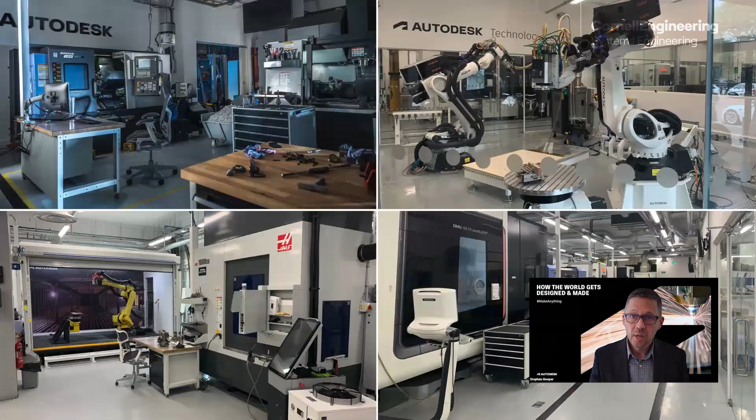So we've invested in our own manufacturing facilities. This is from our organization in Birmingham in the UK. If you're ever in the UK and want to take a tour of this facility, reach out to me and I can get that set up for you. We also have a facility like this in Boston as well, so if you're ever in one of those locations and want to take a look, let me know. Our belief is that by using the technologies and actually employing them, by doing work for our own customers, it helps us better understand how the technology works.

I think you'll also find in most curriculums now, there's a much heavier emphasis put on not just designing, but also seeing the project through to manufacture. And that's something that many professional organizations follow these days as well.

So strategy, why does it matter? Because whatever you do in the world of product design and manufacturing should be driven by what's going on in the market if you want to be successful. Our view is, and this is good news for you all, that in manufacturing there's a huge skill shortage coming. I'll talk a little bit more about why we think that and the implications in a moment.

We also think that there's a dramatic rise in cost. A lot of the global macroeconomic conditions that are being caused by some of the politics that are going on also have an impact on things like material and energy costs. And then the last one is supply chain disruptions. We can talk about those in a bit more detail, but what technologies do we think can solve those?

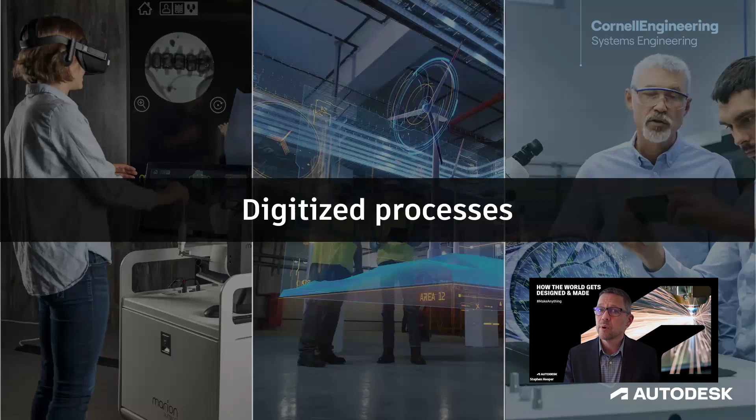Digitized processes: in manufacturing, the move towards digitizing processes has continued since the 1980s to the point now where just about every manufacturing process employs software. The problem is it employs lots of different software, so it makes it very difficult to connect the process. And of course, when you manufacture a product, you don't just use one manufacturing process, you use a whole range of them. So being able to model the system in that environment is also important.

Then the last one is flexible supply chains and logistics. From a logistical sense, that too is a system. So you have a system of suppliers that may be distributed geographically, and you need to be able to model the impact on those suppliers if you want to run a sustainable business. Because if you don't have a view of that system and the impact on your manufacturing process, you can quickly run out of inventory in the middle of a production run, which can be a big problem.

One of the drivers we see for this is that a lot of different technologies and software are used across the manufacturing process. So just in R&D, first article production and design, you could be looking at a range of tools like SolidWorks, Rhino for industrial design, KeyShot for visualization, SolidWorks for modeling, maybe Altium for electronics design. And then when you go into manufacturing, it gets even worse.

The problem is that each one of these tools stores information in a proprietary format that only relates to its individual discipline, which is task-based: 3D modeling, mechanical design, Altium for PCB electronics design. And so you're not able to get a reasonable view of the overall systems architecture, and that should include manufacturing too.

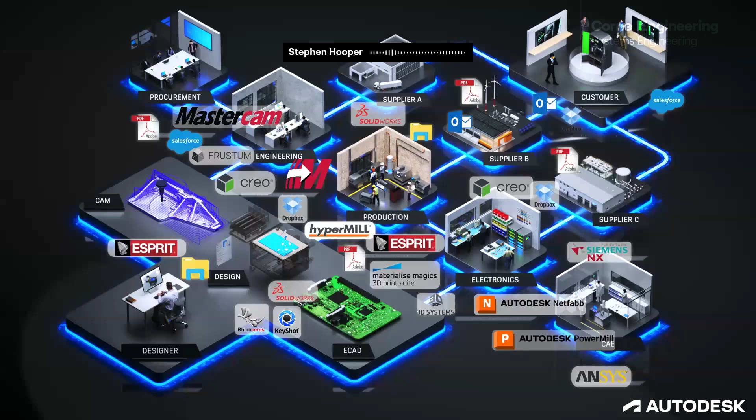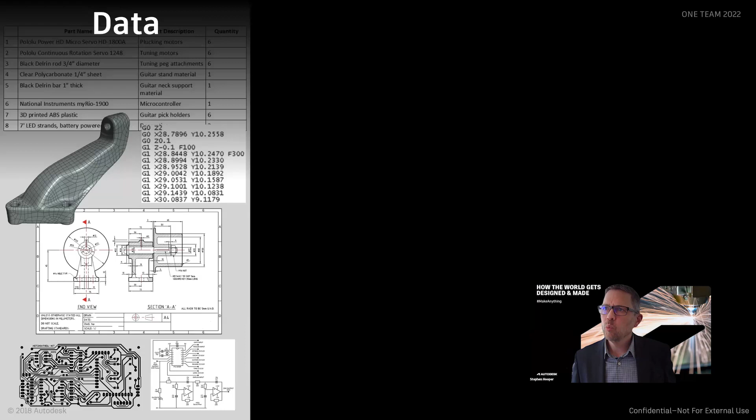We see three core barriers to this for customers. The first is that the data is abstracted and stored in proprietary formats, so boundary representations in models, which are stored in tools like SolidWorks in a parasolid body. You have 2D documentation, traces for electronics, schematics, bills of materials. None of this information is easily updatable. So if you make a change to the 3D model to propagate that change, you need to then go into the manufacturing system, open the proprietary file format, import it, update the manufacturing process, save it, move it on. It's a very waterfall process in an environment that really should be moving towards agile.

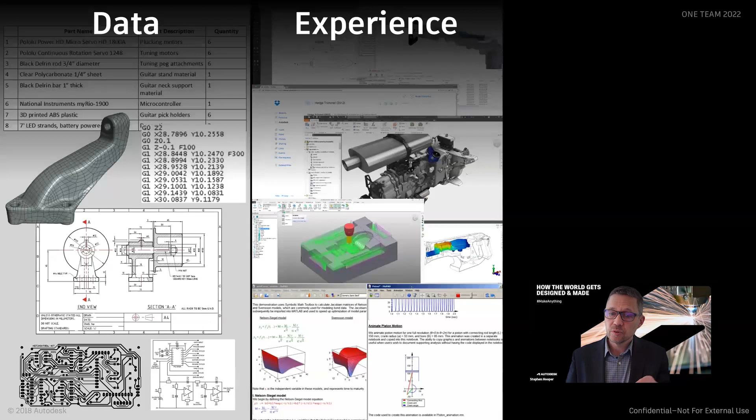The second barrier, and I'm sure you've all experienced this, is that when you use these different task-based solutions, they all have different user interfaces. So it makes it very difficult to learn how each one of these tools work and then how to pass information through them digitally. And then you need a PhD to really understand all of the different technologies in the market, how they relate to one another, and how you would build a single, consistent, cohesive digital thread through your organization.

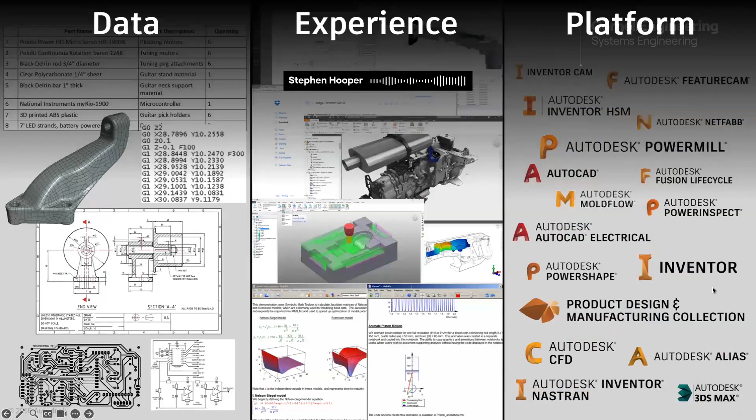And the same is true for Autodesk. We have a massive range of different products in our portfolio today. So our goal has been on converging all of our technologies into one single cloud platform that we call Fusion. The idea is that you build a single digital model that's open and extensible in a graph.

Now, a graph allows us to create a systems level representation, not just of the mechanical or electrical design, but its functional characteristics, as well as the manufacturing process used to produce it. That will ultimately enable us to better model and optimize those product designs and their manufacturing processes. I'll come back to that a bit later on.

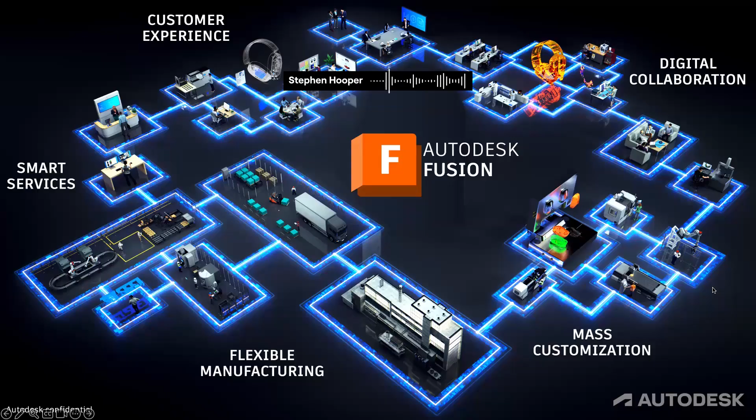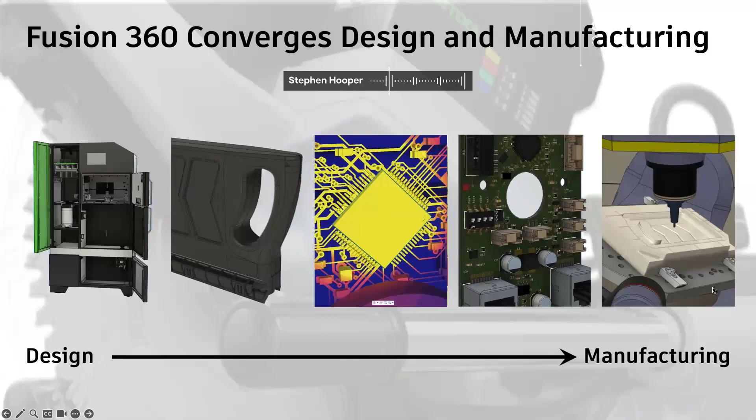Fusion today really focuses on the process of taking a mechanical design, industrial styling, electronics, simulation, and manufacturing. I wanted to give you a little flavor for this because it's foundational when you want to start thinking about systems architecture for a complex product. This particular example is from a company called One Click Metal, a startup making an additive metal 3D printer. So this is Fusion.

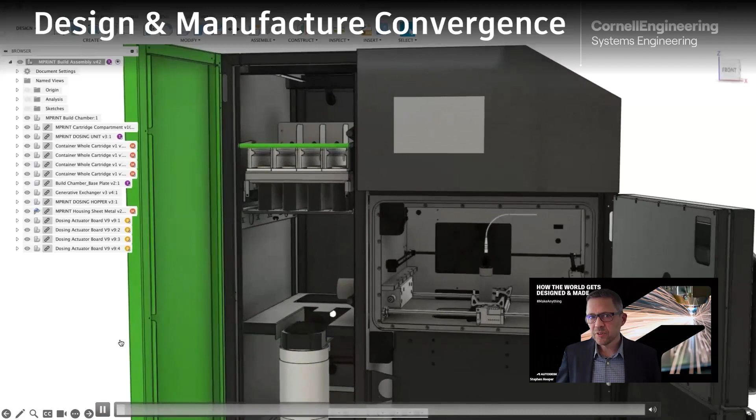The idea is that in Fusion, you can work with data from multiple sources. It can be SolidWorks information, or it can come from Inventor or ANSYS. You can aggregate that information as well as creating information here natively. If data in SolidWorks changes, it updates here.

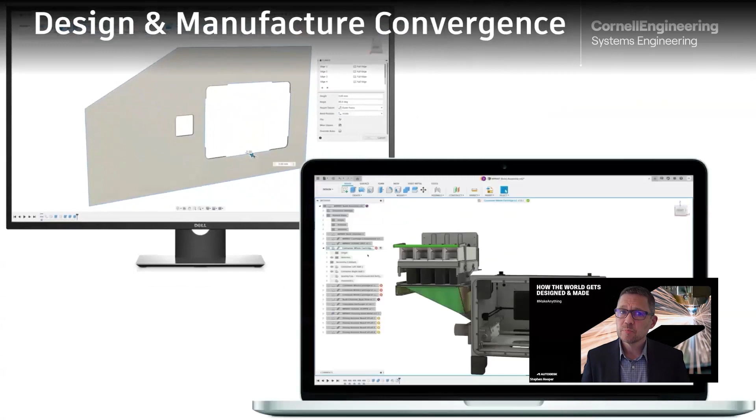The important bit is that it supports multiple personas. You could be a mechanical engineer doing sheet metal in the top left, or an industrial designer doing some styling for the cartridges that go into this system on the bottom right. In fact, you could be an electronics engineer as well, creating the schematics and control systems for the product.

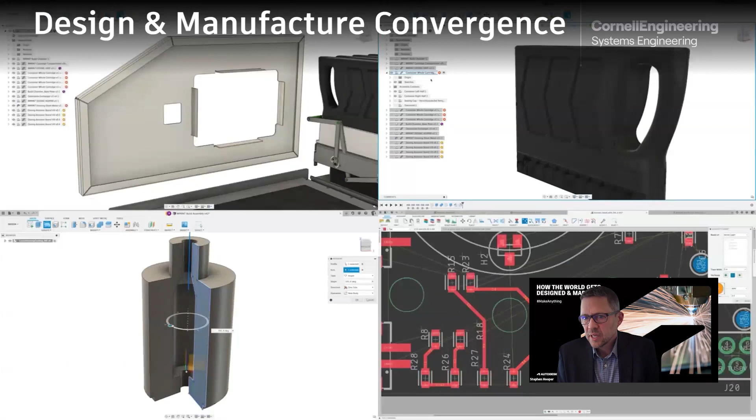The important point is that when teams work collaboratively together, they're accessing the same set of information, which represents the overall system, and they're able to collaborate in real time. A bit like Microsoft 365, you can see all the different users and the different product areas they're currently working in. The idea is that you can be concurrently engineering together as a team.

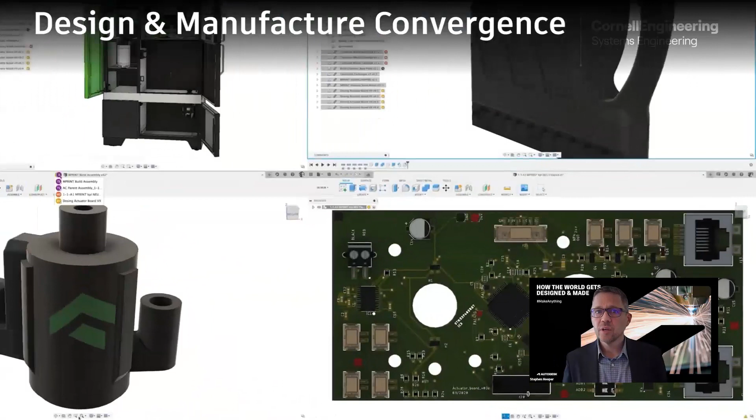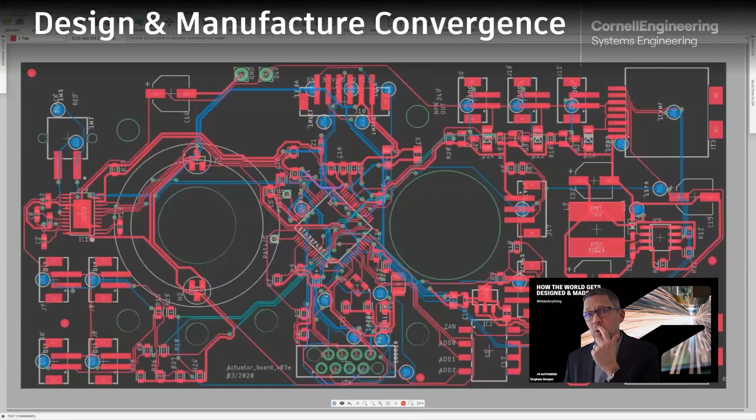So if you're in the electronics environment, you can start with a schematic. You can start to do some analysis of signal integrity across that schematic. You can lay the board out. You can calculate the traces. But because we have a single digital representation in the background, we can convert the 2D board layout and its traces to the 3D representation.

And that enables you to go through into a simulation environment so you can start to look at convection cooling across the surface of those boards to make sure the CPU doesn't overheat, for example.

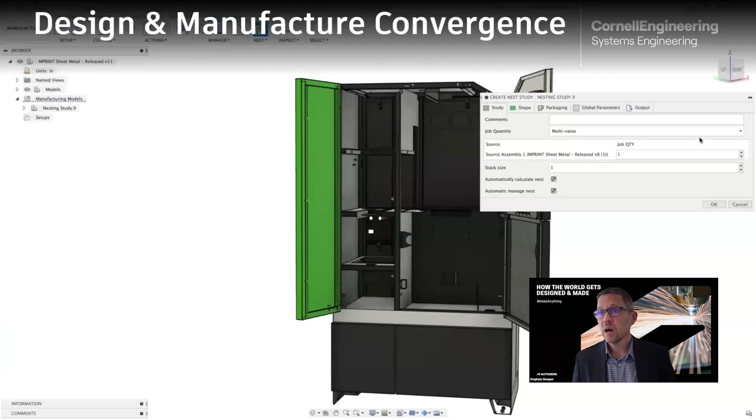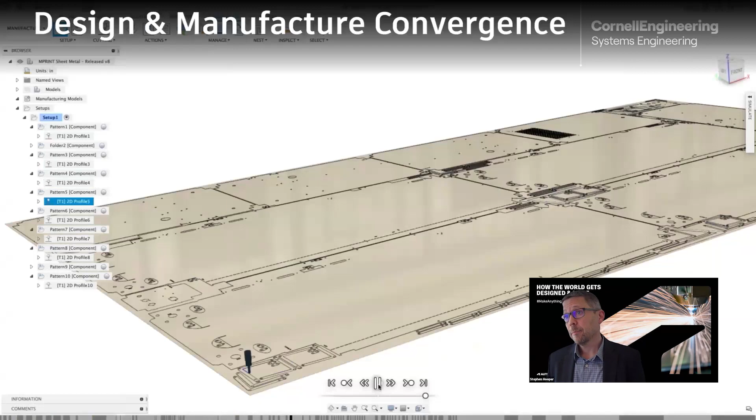The last phase is manufacturing, probably the most important. In this case, you can take the guarding and say, okay, extract all of the 14 gauge or 2 mm thick mild steel, schedule it for production, nest it, take it through to a manufacturing environment in the same platform, and then tool it. So you can choose, in this case, a plasma cutter, and it will calculate the tool paths for you, simulate that, and post-process the information so you can send it to the shop floor for manufacturing.

So that's the idea for Fusion. And as you can see, it's covering a lot of different disciplines. That creates a problem because as products get more and more complex, they involve more and more disciplines. Just in this simple example from a consumer product, there's electronics, mechanical design, styling, wiring, PCB, CPU, chip design. And of course, that gets very complex, and you can't get an idea of the overall product's functional performance characteristics by just 3D modeling it or by just looking at the schematics for electronics, for example.

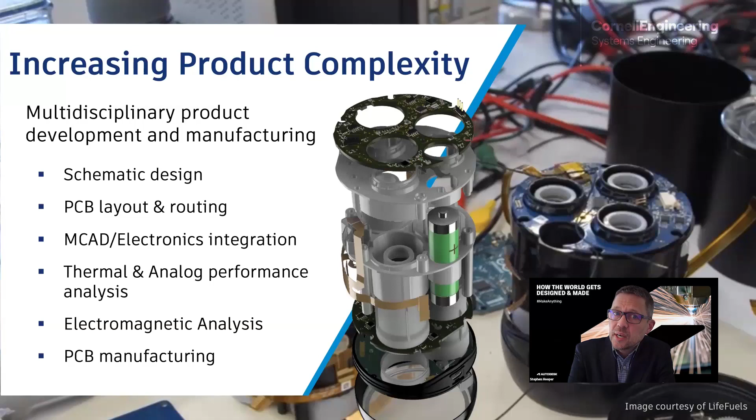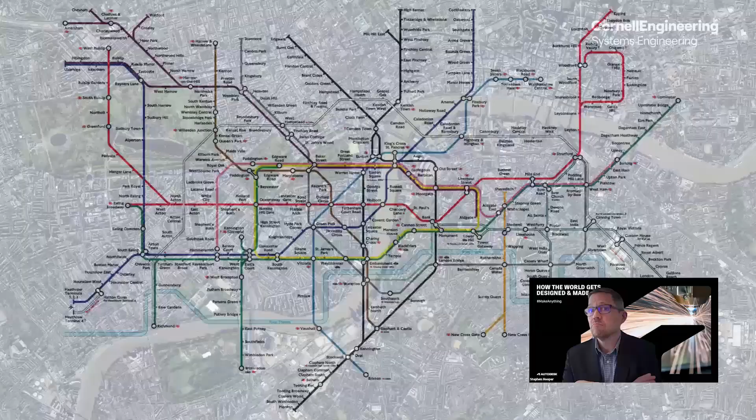So you go through a process of abstraction. One of the best examples of abstraction is the London Underground map. It's simple, it conveys only the information that's required, and it allows you to gain a much better understanding of one of the potential subsystems.

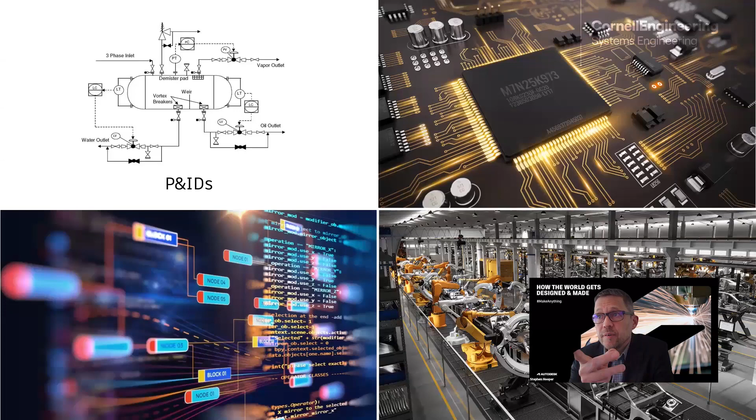That process of abstraction is something that's pretty common across all creative disciplines. For example, if you look at process plant, electronic, software engineering, or factory operations, every one of these industries employs a level of abstraction. If you think about process plants, they have what they call P&IDs, which is simply an abstraction of the higher order system for a petrochemical plant in this case. If you look at electronics, they have schematics, which is a higher order abstraction of the overall function for a circuit board in this case.

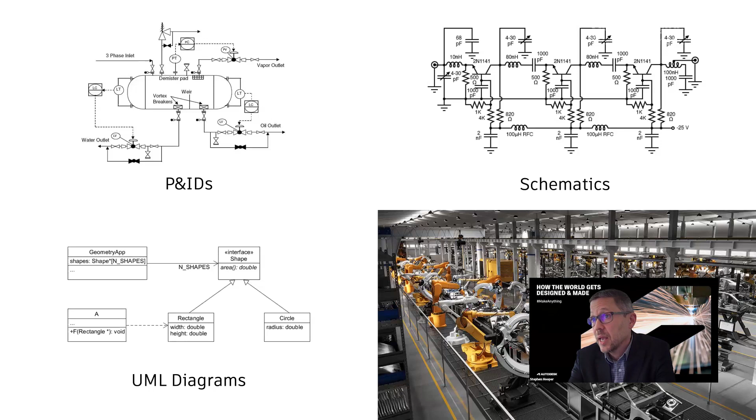In software, we use UML diagrams to create structural diagrams, class diagrams, or sequence diagrams that let us abstract the system and do black box optimization. And even in a factory, there are process models for production that allow us to do operation studies, making sure we're looking at a specific set of characteristics and optimizing them.

What I would say about MBSE is that it's pretty unique in that it starts to combine these higher order abstractions into a complete systems view. And the opportunity here is to extend that, so it's not just electromechanical, but also considers the manufacturing process itself. That's one of the areas we're focused on.

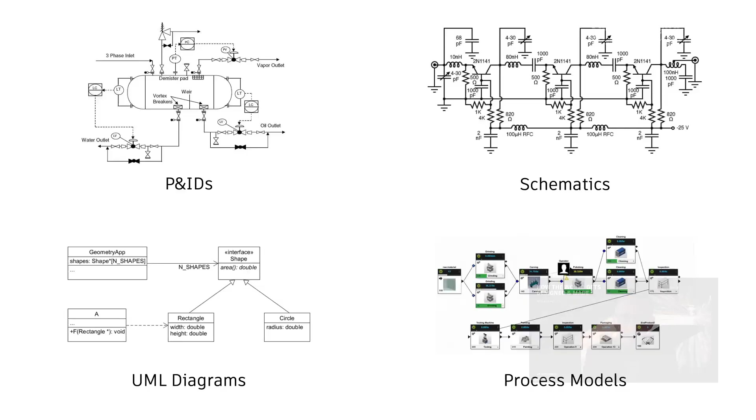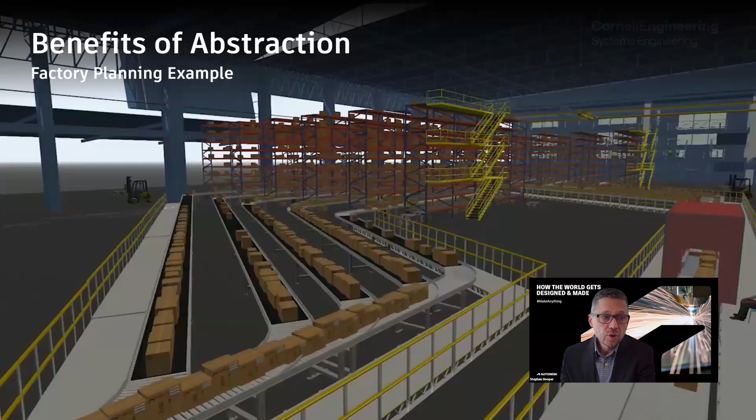I wanted to give you an example here. If you think about higher levels of abstraction, and I mentioned supply chains, Amazon's a great example. In this case, what we're looking at is an Amazon distribution logistics center. You can imagine in one of these centers, it's extremely complex to understand and model what's going on. You've got hundreds of thousands of products.

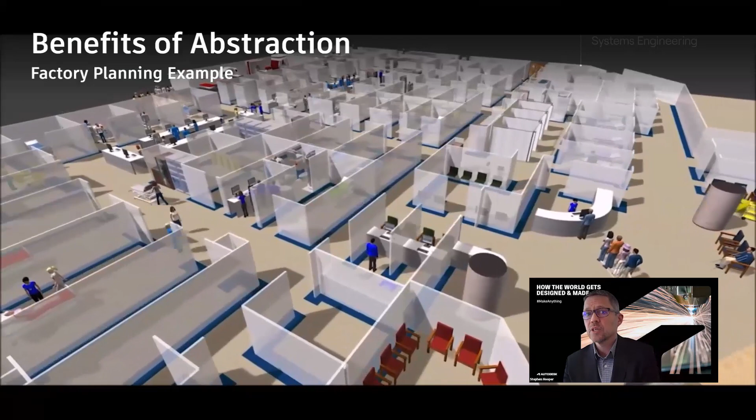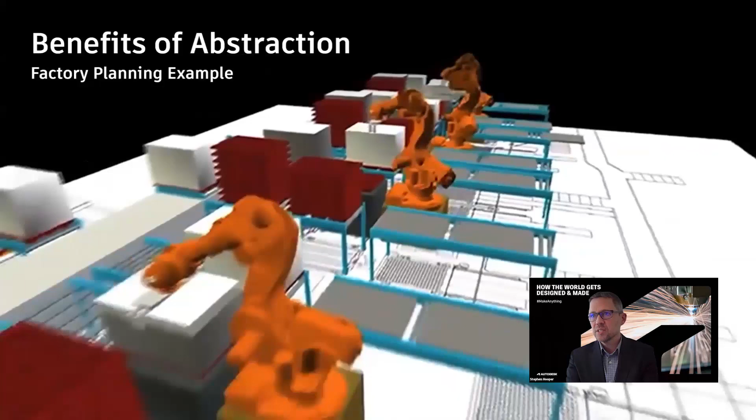The same is true in a hospital where you're processing patients. Logistics centers can be incredibly complex. Any shop floor operation where you're processing equipment and manufacturing products involves a whole array of different subsystems, including people and machines that are often unpredictable. So you can't deal with that level of complexity when you look at the entire system at once. You need to be able to abstract to a lower level of detail.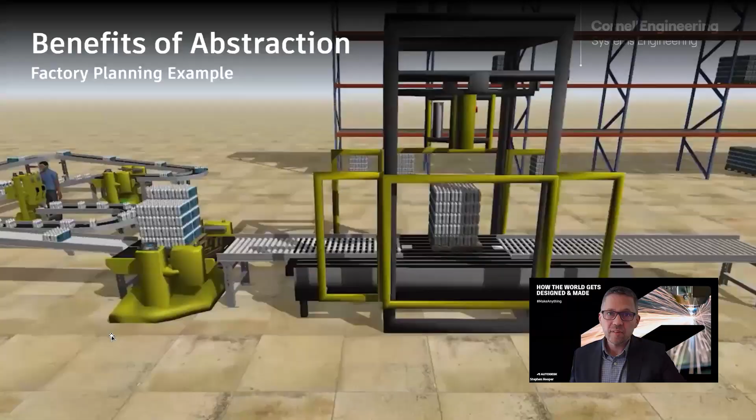So, in the case of operations management, is there anyone that studied operations in the room? Queuing theory, anything like that? No, okay, well this will be relevant, but maybe not so interesting.

When you look at how a factory operates, there are tools, mathematical formulas you can use to evaluate the flow of inventory. There's a thing called Little's Law, which looks at queue processing and queue management. There's a VUT equation, which helps you understand the impact of queuing, and if you pool multiple operators in a queue together, how you can increase the flow rate in a production process. The problem is this is also quite difficult, and you're looking at a particular slice in time. You're not able to evaluate the system with continuous flow across multiple lines and how they interact with one another. So that's an ideal opportunity for systems-based modeling.

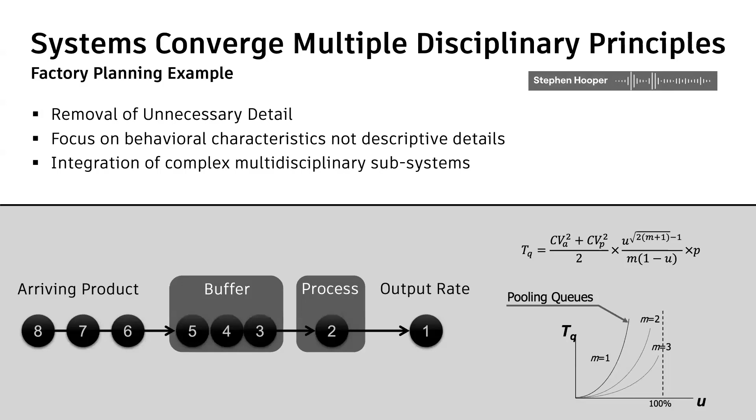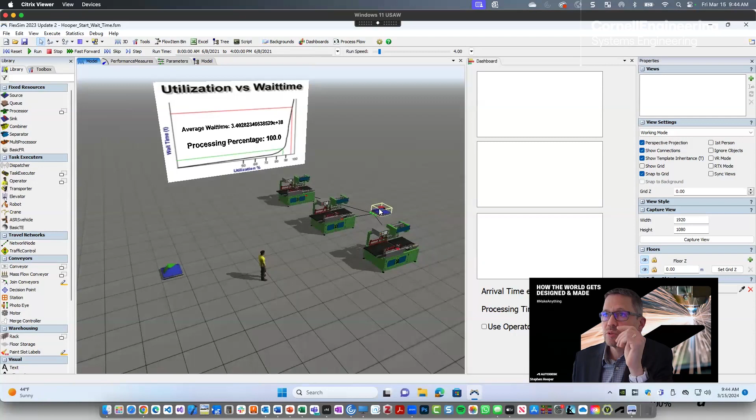Okay, so this is a good example of being able to abstract a system and model it. In this case, what we've got is a source and a sink. The source is where inventory is coming into the process. There's three machines that need to operate on that, and then there's a sink, which is the finished article going through the process.

In a layer of abstraction like this, what we're able to do is start to simulate behavioral characteristics. We can connect the source across to the machines. We can also tell the source that it has an operator, and for this source, we'd like this human being to carry the inventory for us. And so when we do this, we can actually run the analysis and start to get not just a singular slice in time.

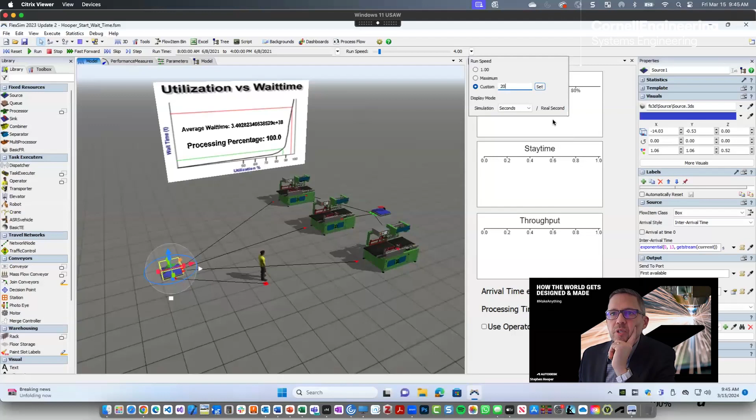Let's speed this up so we're not waiting too long. Rather than a single slice in time, what we're getting is a continuous evaluation for the whole process. You can start to see the operator processing products, and we can graph that data because it's an abstraction, which makes it easier for us to graph.

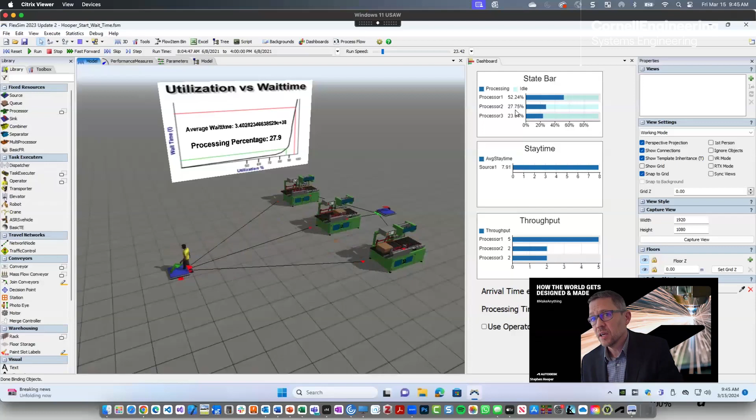You can see the operational utilization for each machine. In this case, we're reaching about 50% machine utilization, which isn't great, because if you've invested millions of dollars in your plant equipment, you want to make sure you're optimizing the machine for the best utilization so you have the highest flow rate and manufacturing process efficiency possible. So you can see here we're yielding about 16. If I run the simulation all the way through to its conclusion, we're probably processing somewhere in the order of 1,100 products in that time, with an average process efficiency or utilization rate of about 45 to 48%.

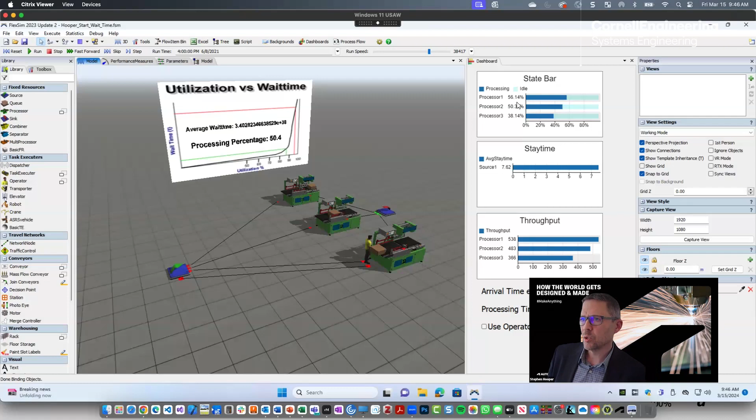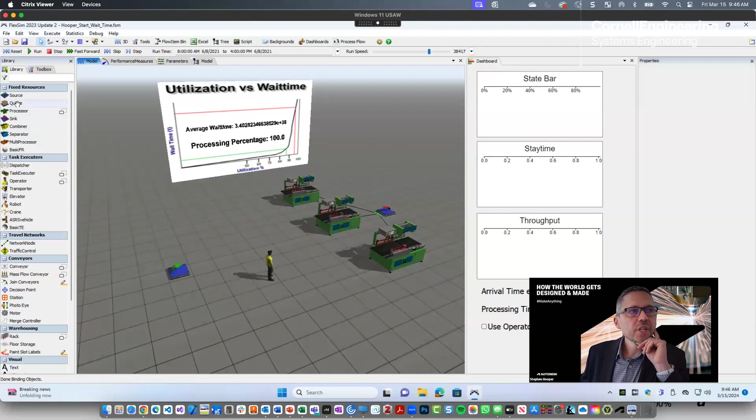So the thing about systems models is that they let you start to optimize what's going on in this model. If I come back, I'm going to break the links here, stop and reset the model. And what I'm going to do is introduce a queue, which is going to act as a buffer. So now I can connect the source to the queue, take the queue and connect that to the machines.

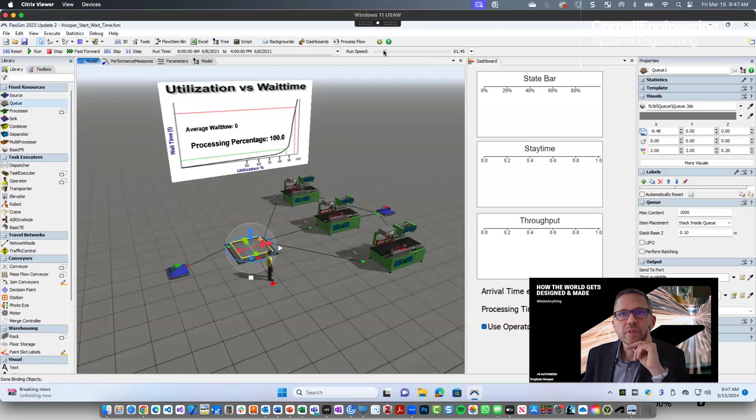And then I'll also connect the queue to the operator again and tell it to use that operator and stop and reset. Now I'll just change the timing so we can watch what happens a little easier, and then run this simulation.

What you'll see now is something slightly different. Because there's a buffer, we're allowing the inventory to stack up, and so there's still a single queue to the 3 machines, which is optimal. But now look at the utilization rates on each one of the machines — they're actually going up and up. Now we're up into the early 60s. I'll guess that when we run this through, we're going to end up with utilization rates in the mid 70s.

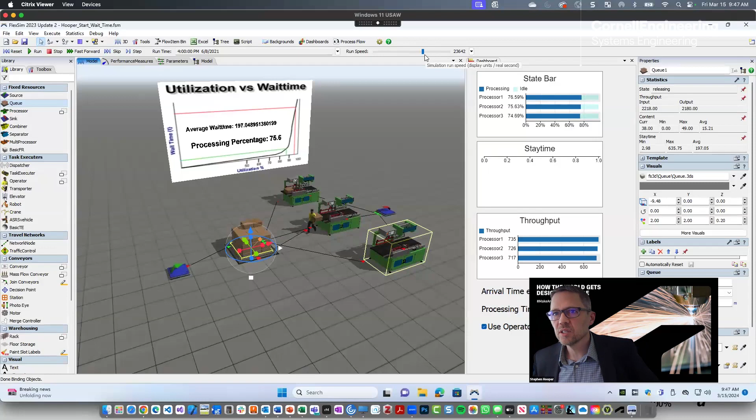So here we go. As it runs through, you can see we're up to 70%. And when we complete the simulation, we've got a mean processing time, or utilization rate, of about 75%. And the throughput now has gone from 1,100 products in the same space of time to 2,100 products.

So I realize not everyone in the room might be interested in operations management. Actually, you should be, because if you're going to go into manufacturing, the fastest way to fail is to design a beautiful product that can't be made cost effectively. So your job as a mechanical engineer, or an electrical engineer, is to create a product that solves a market problem — but above all, to make that product profitable. Your job is ensuring product profitability and accuracy, and these tools help you do that. The problem is they do it in isolation, so you're not getting a view of the entire system.

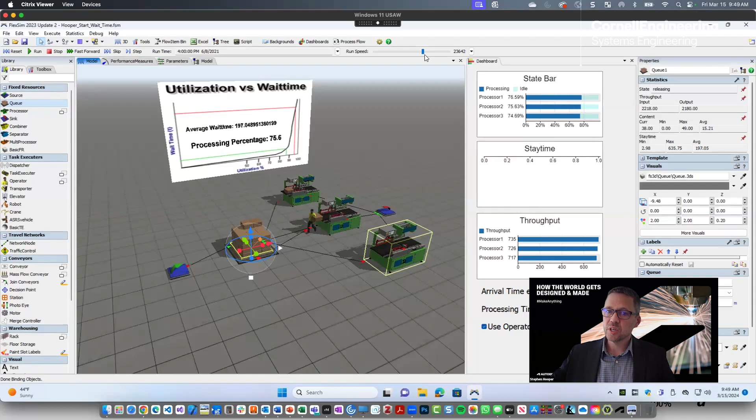In this model, for each machine we've calculated the mean time for processing, and we have statistical data — the standard deviation of arrival time and processing time. From that, we can model what we expect the factory flow to look like. But of course, there's a subsystem for the machine itself, and so you end up with this nested set of systems and subsystems, which is really the future of what you'll see in design and manufacturing.

Hopefully that helps you understand why abstraction of a complex system can help you model a particular characteristic in isolation, and that can let you optimize the process. Because really, MBSE is all about optimization of process. But that process is getting more and more complex, introducing more and more different processes or steps, and it shouldn't be completely isolated to just design disciplines.

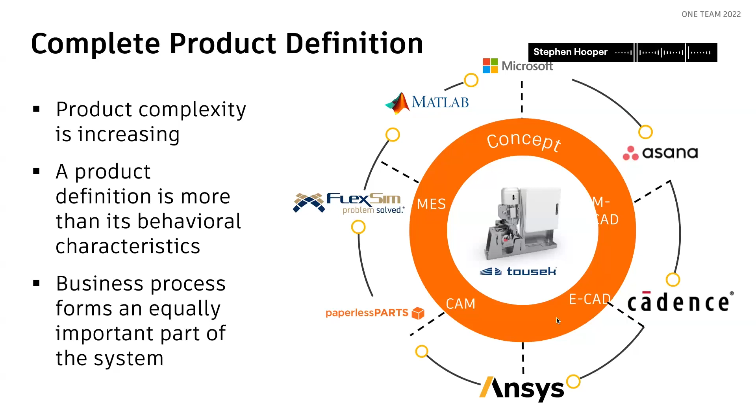So the product we just showed you for manufacturing execution analysis is a tool called FlexSim. But there are CAM tools — you need a CAM tool to model the process of machining or printing a part. There are electronics tools, simulation tools, but also business processes that sit around this. There are math modelers like MATLAB or Wolfram that help you look at the overall formulaic principles for a particular product. Those product behavioral characteristics are what you're seeking to model in a systems engineering environment, but the business process is just as important a part of that.

So you can see an expansion of these systems. You could take an average consumer product to market, and you'd need something like Cadence for electronics. You might use a requirements management system. You'll need a CRM system to sell it, like Salesforce. You'll be building software that needs to run on a platform like AWS. You'll need to model overall behavioral characteristics with something like Mechanica. You'll need to manage requirements, visualization, manufacturing, sourcing of materials, simulation, software elements like maybe some code in Python, and model the support process. Being able to model this complex environment is way too much information to process at any one particular level.

You also, as a mechanical engineer — not just a mechanical engineer, any form of engineer — need to watch out for one of the biggest issues: scope creep. Scope creep will happen as you take a particular set of market or customer requirements.

In software engineering, we talk about: did you build the software right? And did you build the right software? These are actually two different questions. Building the software right means making sure it's performant, it doesn't have bugs, and it does what you need it to do.

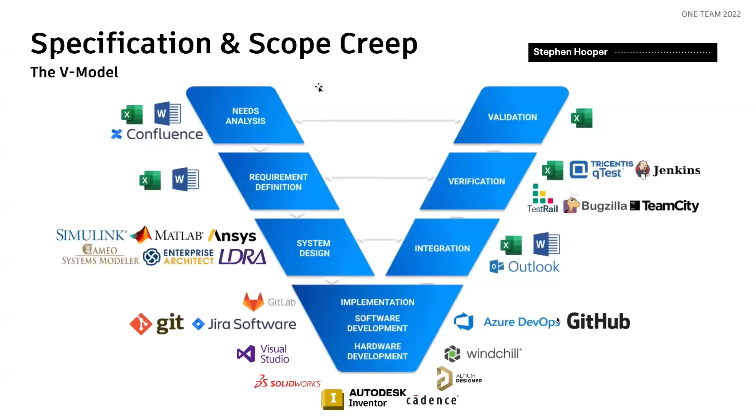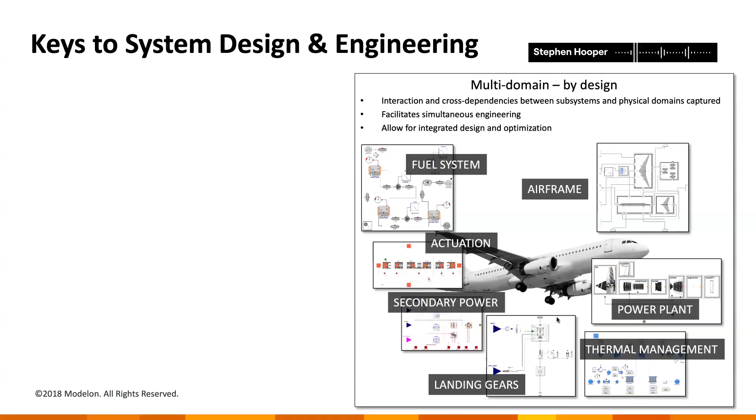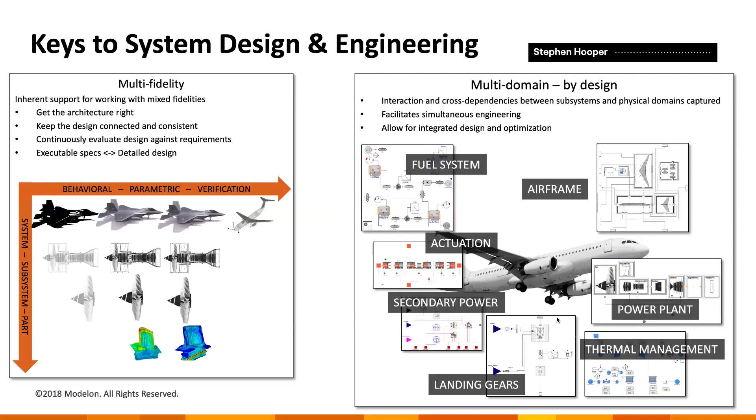That enables you to create multiple layers of abstraction as you move down from the overall architecture into the individual detailed disciplines. It enables you to go from the behavioral characteristics through a parametric definition into verification, while you go from system to subsystem to part level definition. That's kind of the key about what we're talking about here, being able to model that.

So at Autodesk, what we're trying to do is develop the foundational data structure to do this. We use a graph-based modeling system, and in a graph system we're able to store information in a database that's relational, and we can open up that graph to include all disciplines of the design.

So what I wanted to get into next is where this is going in the future, because I think this bit's really exciting. And this is the bit I want you to start focusing on, because I think it's going to be really important to your careers as you move forward.

So for the last 30 years, the software engineering tools used to describe products and manufacture them have been what I call task-based. We mentioned that at the beginning. There's a CAD tool, a CAM tool, a simulation tool, a data management tool. The information is all stored in a proprietary format.

We then talked about how these systems are converging so that we get one digital model representation of the product and its manufacturing process. Our view is that that's going to lead to disruption in the market in the form of what we call generative design, but intelligent automation.

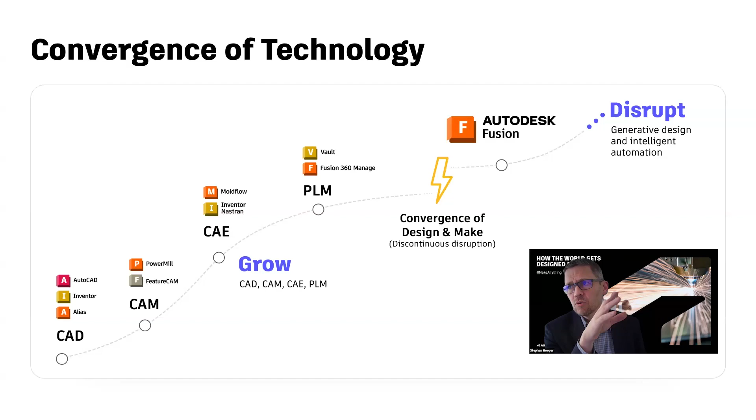Right now you're going to be hearing all sorts of stuff about generative AI. A lot of it's true, and it is going to be massively disruptive. It's in a bit of a hype cycle right now. Most of it is focused on text-based prompts, some of it in visualization. You're starting to see generative AI for video, for example. We think it's going to have a massive impact in design.

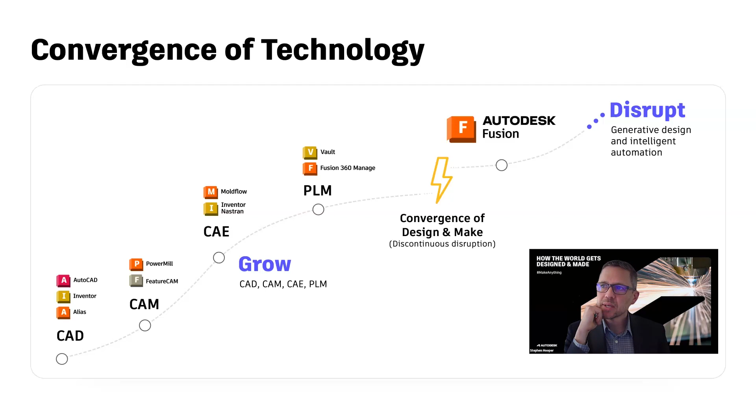We've been planning for this for a little while. First, we converged all of our technologies to create a single digital platform on which you can model 3D geometry, electronics, etc. Second, we built an open graph model for modeling a complete product. And now what we're starting to do is focus on automation.

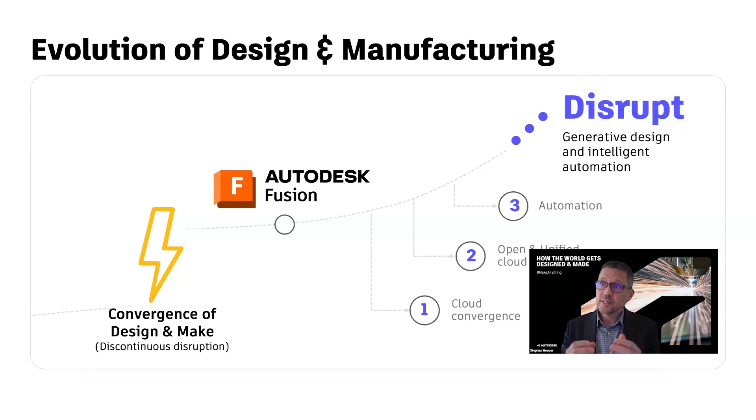This is why a systems level representation is going to be important. It means that if you understand the manufacturing process, you can start to automate the process of developing the design based on some functional characteristics.

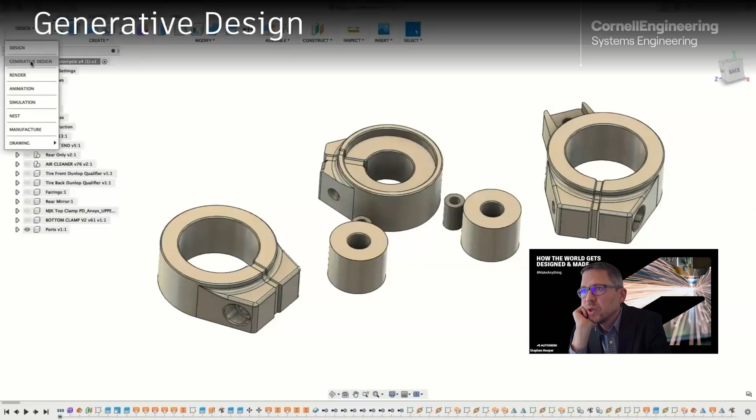So this is a quick example of generative design. In this case, what we're doing is specifying some elements of a design that we'd like to remain, the interface points. Then we can specify some design conditions: certain elements that need to remain fixed, some structural loading conditions, and areas of the design we'd like to avoid.

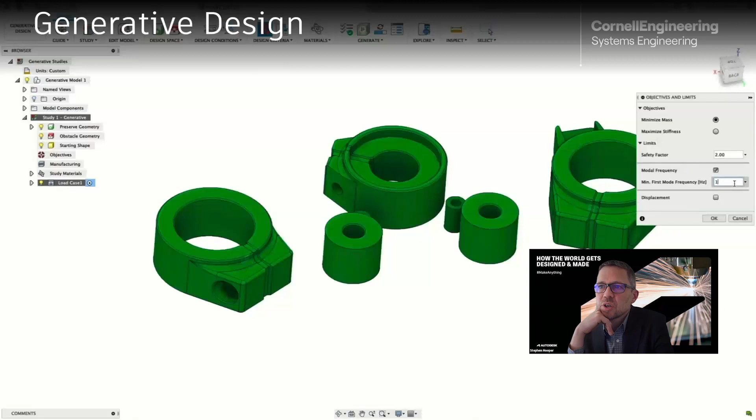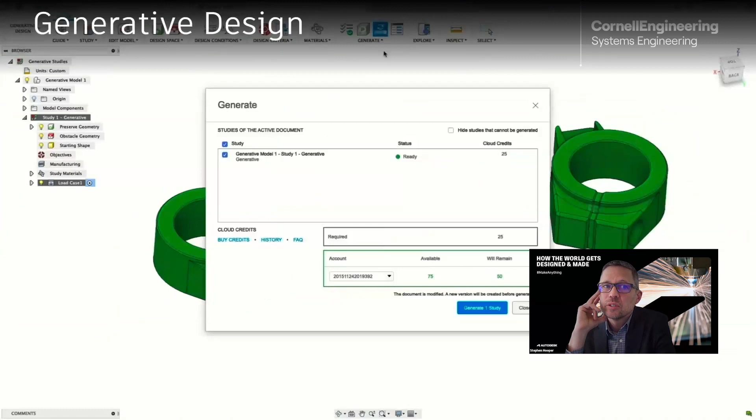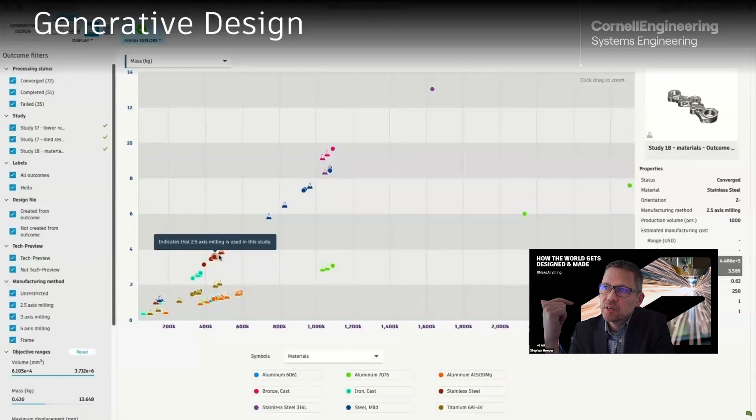We can also talk about what the optimization characteristics are. We want to optimize this potentially for a factor of safety of 2, say. We can also tell it the manufacturing process, because we understand the systems representation of how this product will be made. With that information, we can generatively define a range of different options for the actual mechanical design. As an engineer, your job is really just to make the right trade-off decisions to get the optimal part — maybe weight versus factor of safety, factor of safety versus cost, or cost versus weight.

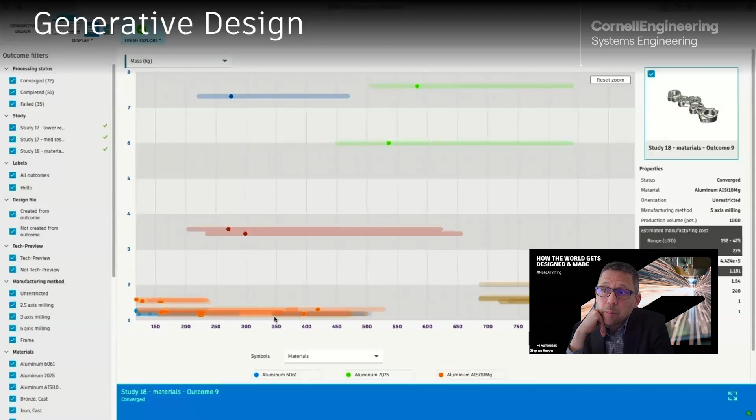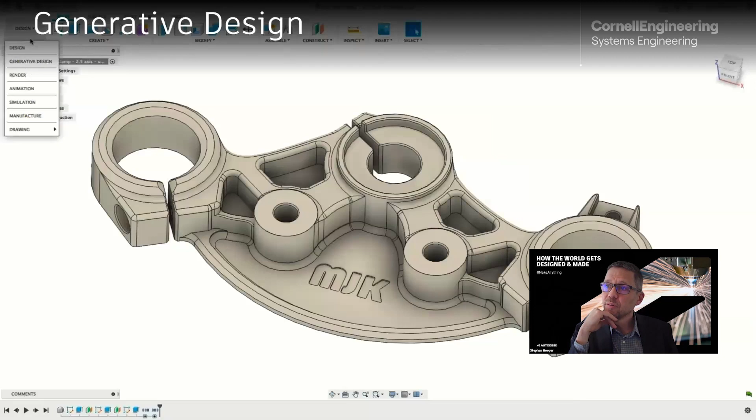So you start to make those trade-off decisions. This is about building a product that's functional, cost effective to manufacture, and highly differentiated from anything else in the market. Generative design enables you to automate the process of creating geometry like that. It doesn't mean you won't go and edit it as a designer, but it does mean it's going to be a powerful tool for engineers to optimize and manufacture products.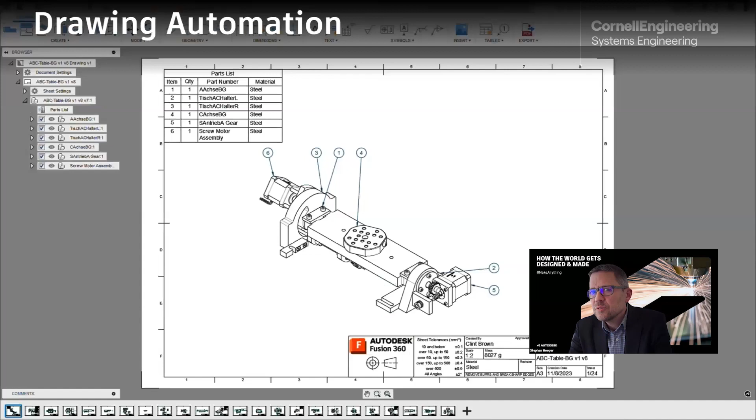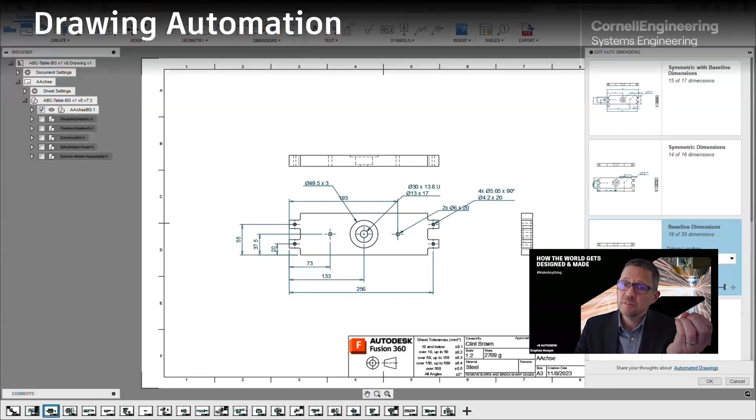The focus for mechanical or electrical engineering has historically had a lot of focus on building 3D models and adding dimensions to communicate them to the manufacturing floor. Our belief is that this is going to change with AI. These lower value added tasks, creating documentation or building a 3D shape, are really not what mechanical, electrical, or systems engineering is about. The whole process of engineering is about taking a set of requirements and making the right trade-off decisions for the most cost-effective products you can bring to market, differentiated from your competition. Any time spent creating documentation or machining a part is wasted time.

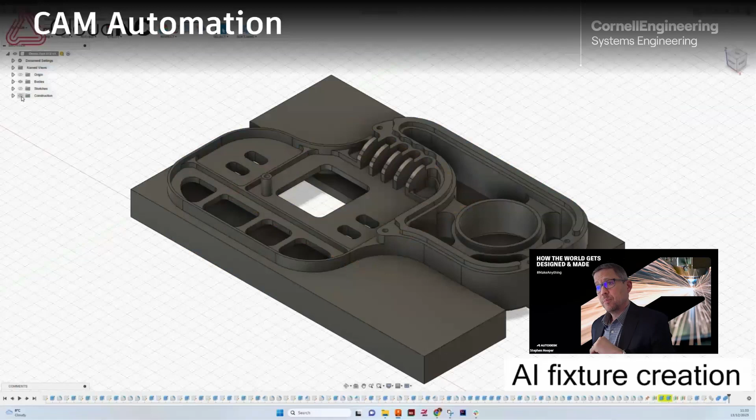So in this example, you've got another 3D model you need to manufacture. I often say to people, you're taking notes on your laptop — imagine when you got home, if you had to spend as much time programming your 2D printer to print that document as it did for you to write it. You'd think that was crazy. And that's what we're changing here.

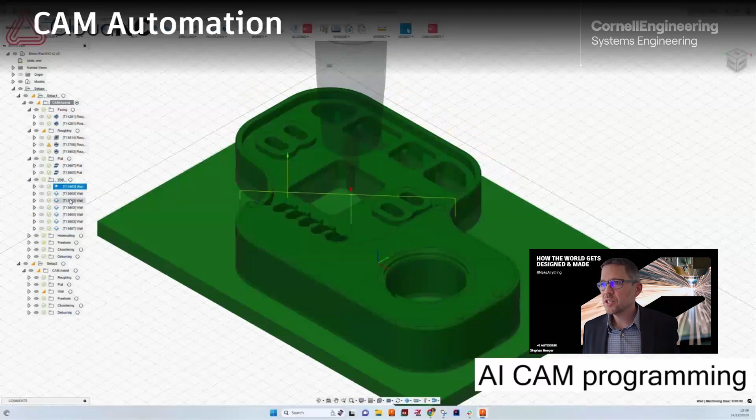Here you can see we're automating the process of taking a 3D model and building all of the machining strategies necessary to manufacture it. We can play the simulation back and you'll see the stock material removal, going from the raw material stock all the way through to the finished part.

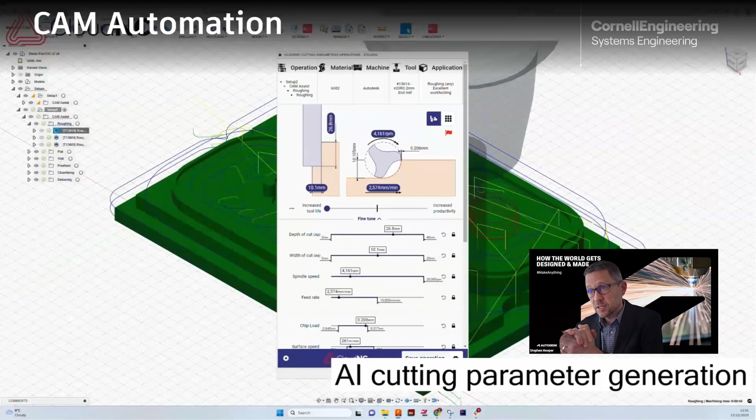We will also optimize the cutting parameters with AI. As we go through the process of deciding how deep to cut and how fast to cut, there's a trade-off between breaking tools or not being as operationally efficient as you would like. Remember my factory simulation earlier as a subsystem — the cycle time on this machine is what tells you the flow rate in the factory.

Those two subsystems today are disconnected, and that's really what we think the future of MBSE will be. It won't be you as mechanical or electrical engineers making shapes or teaching machines how to make the shapes that you just made.

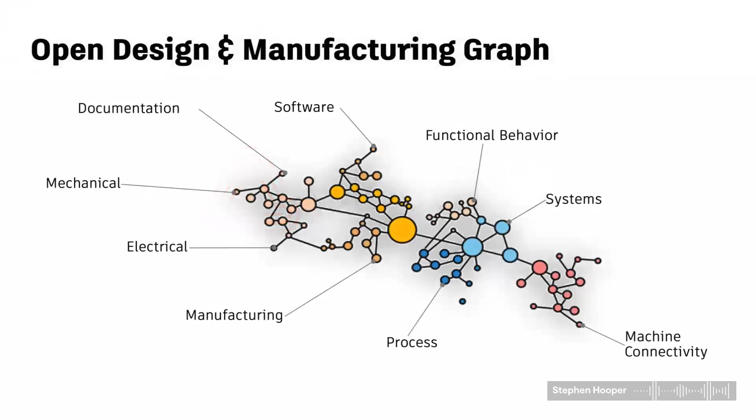We think it's possible to take AI and convert those systems requirements into a high-level systems architecture. Then we think we can automate the process of taking each element of that systems architecture and moving the data to the detail engineering discipline, whether that's mechanical design, electronics, simulation, or manufacturing.

This is what we think the future will be with systems engineering. I'll bet you in 10 years from now, the product development industry has changed, just like the software industry has changed, and you as engineers will spend your time on the systems architecture, not details. I can tell you that's happening in software right now.

You've seen with ChatGPT that you can get it to write Python scripts, even C++ for you. Microsoft's implementing that with Copilot. So software engineers that have spent their entire careers building domain expertise writing classes to represent objects are now starting to be very concerned that tools like ChatGPT are going to basically replace their jobs.

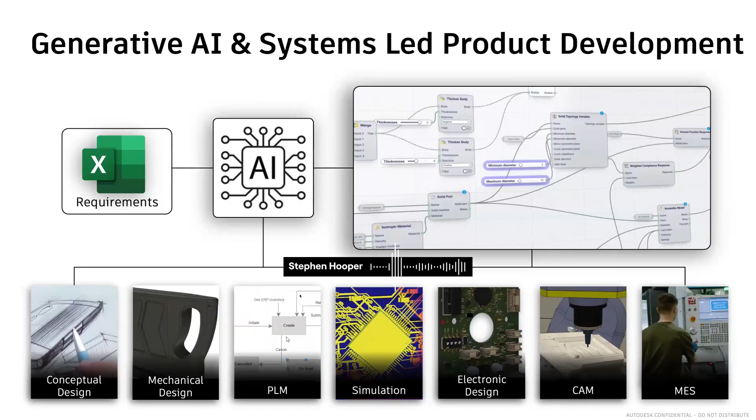And I think that's what I really wanted to leave you with here. The first thing is my advice to you—I've been around in this industry longer than I'd like to admit, and when I was your age, our whole focus was on building 3D models that satisfied mechanical requirements, validating them, and creating the documentation for them.

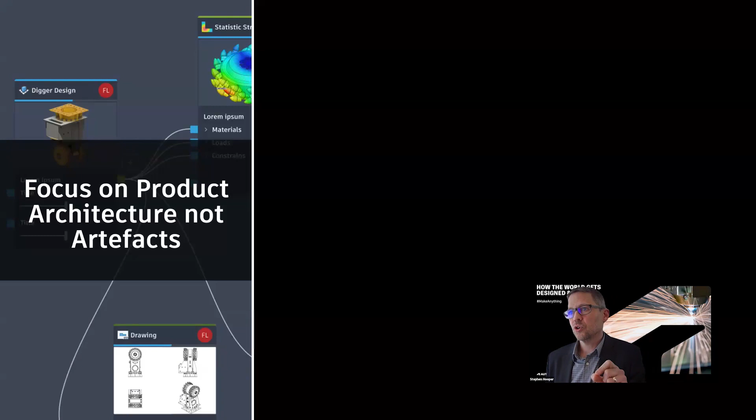I think the future suggests the best place to spend your time is on product architecture, not the artifacts. The artifacts are 3D models, drawings, schematics, etc. As a mechanical, electrical, software, or systems engineer, you're focused on the product architecture—the solution to the market requirement you're trying to build that's cost effective—not the detail.

The second thing I would say is diversify your study as much as possible. I was lucky working at Autodesk that I got to work in lots of different departments. I went back and did software engineering. I've just been back to Cornell to do my exec MBA. So I believe firmly that you want to keep learning through the whole of your life.

I also think at an undergrad level or even postgrad, if you look at how human progress has evolved in the creative areas, you can look back and say there was a period of time called the Renaissance. In the Renaissance period, people learned lots of different disciplines. And the beauty of that is you could innovate because you would take a concept from one area of study and apply it to another.

We kind of lost that for a while because we went into detailed domain knowledge, where people would study a particular discipline and become absolute experts in it. I think what you're about to see with technologies that automate those detail areas of discipline is there'll be a return back to a kind of Renaissance period where you want to become multifaceted.

You're going to want to know some Python scripting, some software engineering. You're going to want to know about how an electronic circuit board is made, how to design one, and how it can drive hydraulics, pneumatics, or mechanical systems, because the future is to focus on the architecture, not the detailed domain discipline.